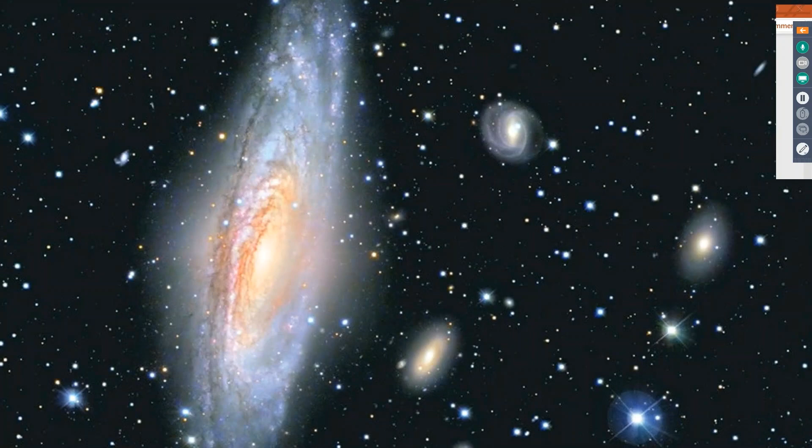I know these are very tedious terms to understand, so let's understand them in the terms that we do. Let's observe the photos they have captured with their camera. Yes, that's what I'm talking about.

The Canada-France Hawaii Telescope, as a leader, understands that they have to stay ahead of the competition. That's why they decided to replace their existing structure with a new one, the Mauna Kea Spectroscopic Explorer. This is where SolidWorks 2019 comes into play. SolidWorks 2019 has many more features that help them design their spectroscopic explorer.

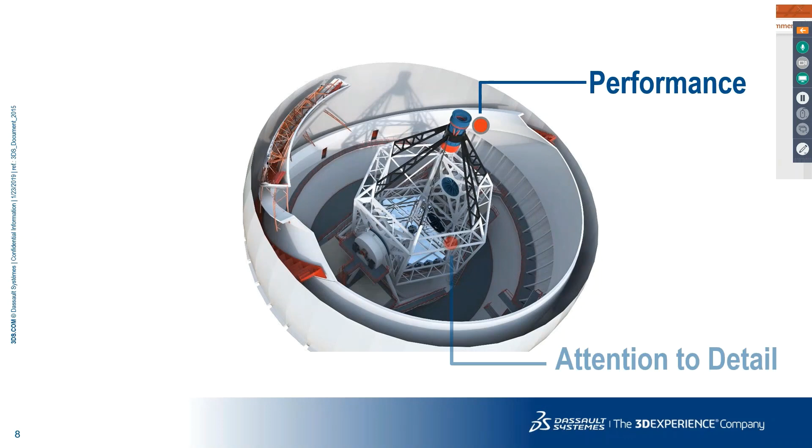So today we are going to see these things in 4 sections. First, we will see how the performance has been improved. Then we'll pay attention to some details. Then we'll see some enhancements from the design ecosystem, and finally, what new and exciting innovations SolidWorks has this year. I hope you are all excited.

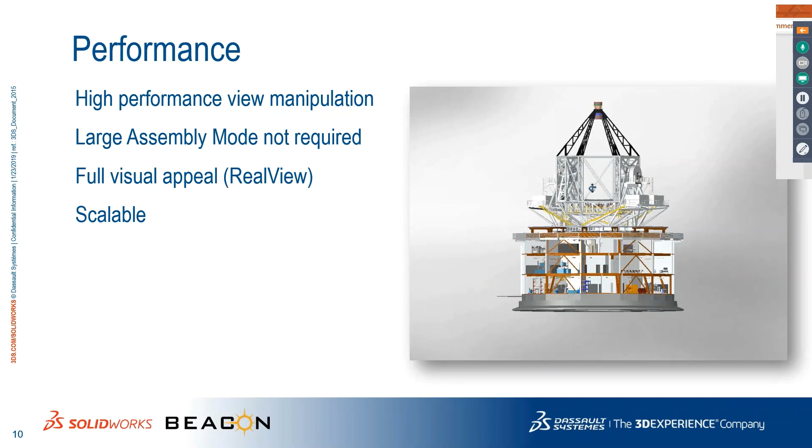Let me start with the first section, performance. The very first enhancement we're going to see is the performance enhancement, in which we'll see how a large assembly can be opened easily while performance is still maintained in SolidWorks 2019.

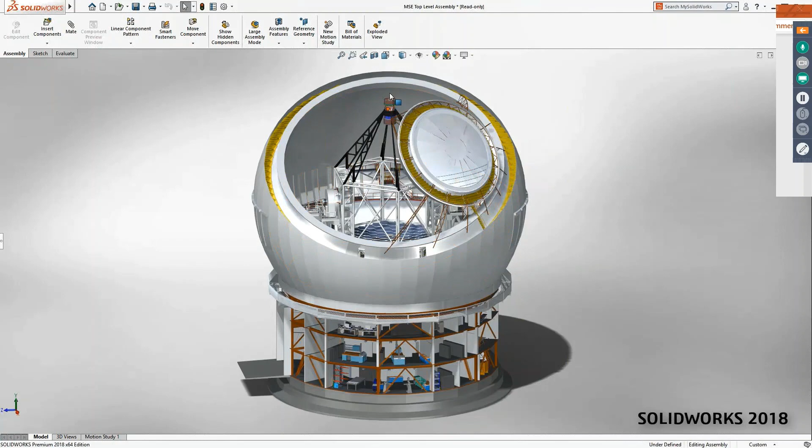Let me jump to SolidWorks. In SolidWorks 2018, as you can see on the screen, if we have to open such a large assembly, we have to activate large assembly mode, and we have to sacrifice details of the components, edges, shadows, real view, etc. If I turn off large assembly mode, these things can still be seen, but my graphic performance is sacrificed, as you can clearly observe the choppiness in the model.

Of course, SolidWorks 2019 changes the game. We can still turn off large assembly mode, and I can still improve my graphic performance. In the side-by-side comparison, you can clearly see how the graphic performance has increased.

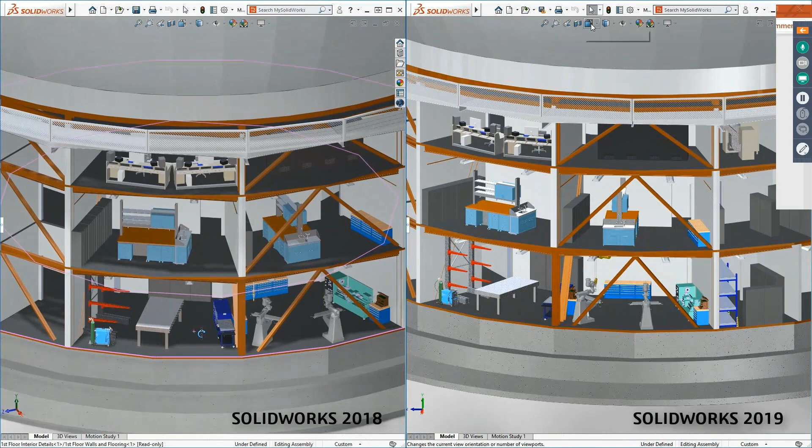Basically, it utilizes more of your graphic card and gives you the real experience of working with large assemblies. Operations like zooming, panning, and rotating will be done very easily in SolidWorks 2019, and it will definitely help improve your perspective when viewing large assemblies.

Definitely. So in SolidWorks 2019, it is now a smoother, more responsive, and real-time dynamic model display that I bring to the table using SolidWorks 2019.

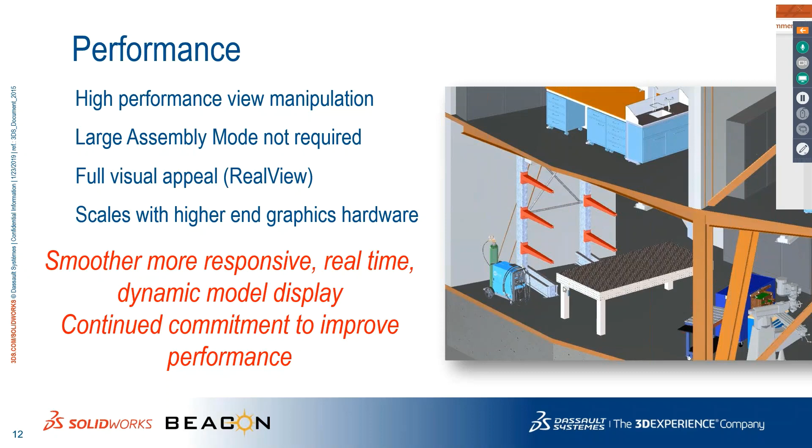Okay, the next enhancement is in large design review mode, and as you can see, we can open assemblies in seconds. Conventionally, we use large design review mode for opening and viewing assemblies. But in 2019, large design review mode has been enhanced, and it's not only capable of viewing, but we also have the capability to add new workflows to it. Let's dive into SolidWorks and see what it has.

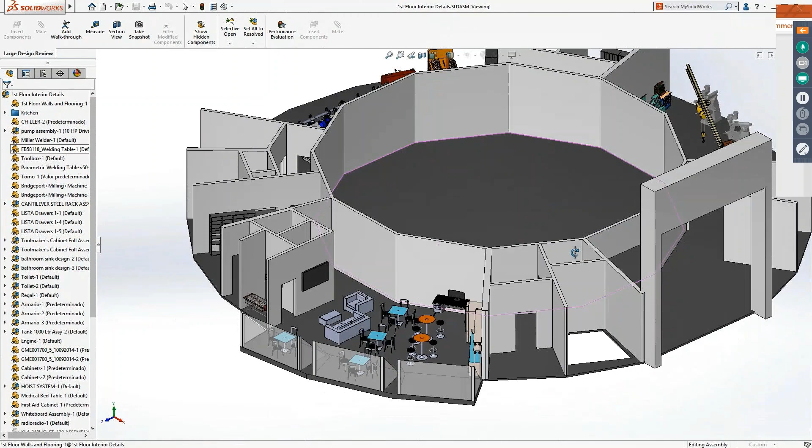When I go to SolidWorks, you can clearly see that when I open this assembly in large design review mode, the assembly opens in seconds, and we have different abilities here. We can select parts, zoom, pan, rotate, and do similar operations. If you want to measure distances between two places or planes, it's possible in large design review. Taking section views is also possible.

Once again, if we hide any components, that is also possible in large design review mode. In SolidWorks 2019, we have a new option of editing the assembly in large design review mode, where we can have the reference plane information displayed along with the mating information as well.

Let me turn on the layout of this pump, and we are going to insert new components here. Now we can insert new components into large design review. If you want to delete any components, that is also possible.

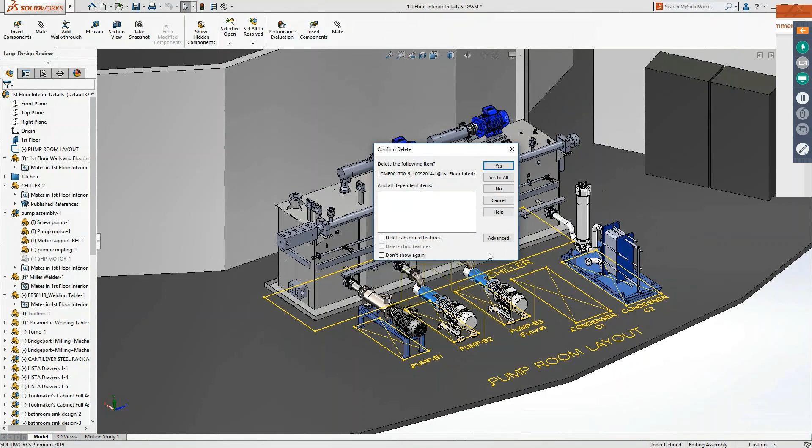Let me go ahead and insert a new component of this pump assembly. We can directly drag and drop these things into the assembly, and next we want to mate this. We can do smart mates like we do with regular assemblies.

The mate displays can also be there, and if you want to add any magnetic mate components to quickly position our assemblies, that is also possible with this new enhancement in SolidWorks 2019.

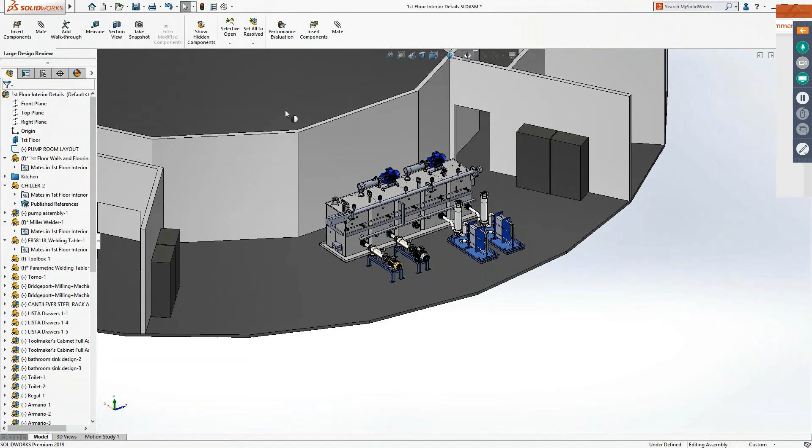If you want to change the configuration of the existing parts, changing the configuration is very easy in large design review mode. And finally, if the components are hidden along the way, we can easily bring back those components like these ones.

Finally, we can save this into a new assembly, and whenever we open this in resolved mode, these components will still be in their places, so we can position the component quickly using this large design review mode itself.

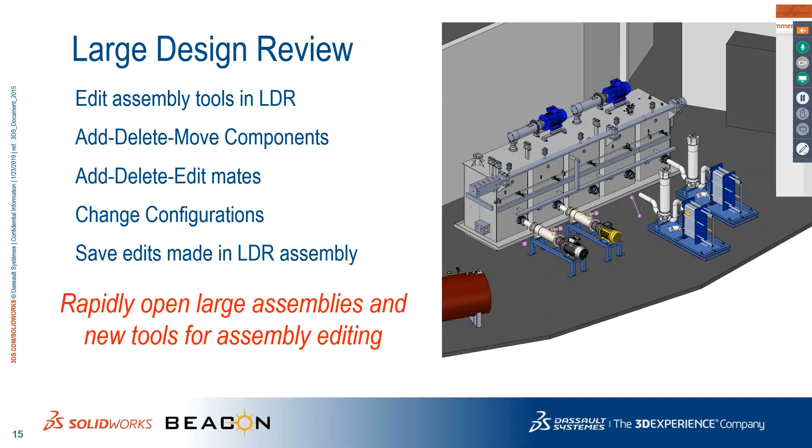So in a nutshell, we can rapidly open our large assemblies, and it is a new tool for assembly editing, the large design review itself. With this, let me move on to the next set of announcements that SolidWorks brings to the table.

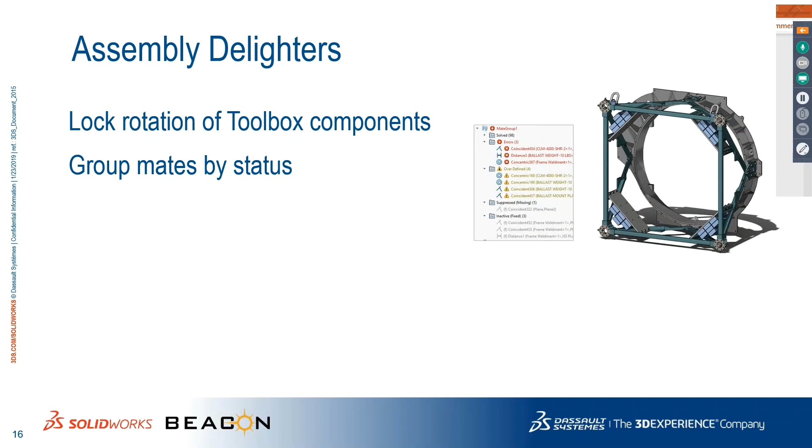This announcement is in Assembly Delighters, and it helps you manage your assembly mates information. Let me jump to SolidWorks and showcase it to you.

When I go to this assembly, as you can see, we are dealing with lots of mates. Now in 2019 we have an option to group these mates by status or by separate fastener. Let me go ahead and group this by status.

As I click, you can see folders have been created where solved and unsolved mates are defined. If you want to edit any mates, we can directly go specify the missing references here, and when I click OK, it will ask me to replace all the missing references at once.

Yes, that is possible. Now if you want to delete or suppress any mates, they will be categorized into their separate folder like these ones. And if at any point you want to delete these things, we can go ahead and delete those too. Finally, inactive mates are separated into their own folder, and with this we can definitely improve performance when dealing with mates in the assembly.

Most companies want their toolbox components to be at a fixed position that does not move. We can just right click over the folder and lock all concentric rotation at once.

In SolidWorks 2019, we have an option of locking these toolbox components directly from the options toolbar. We can hover over the Hole Wizard toolbox, and lock the concentric rotation at once. This will save us time and give us the edge of dealing with mates very quickly and easily.

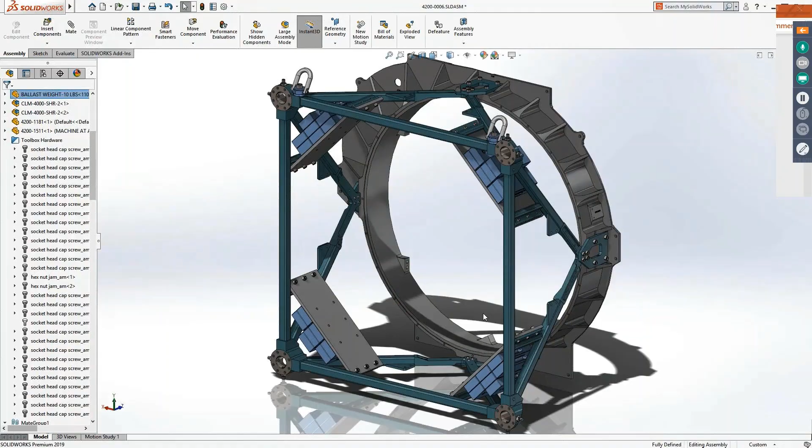So in Assembly Delighters, we have productivity tools for robust assembly interaction, and we can have high quality deliverables done in less time. With this, I'm concluding Assembly Delighters and moving on to the next enhancement, called Silhouette Defeature.

In Silhouette Defeature, we have a very exciting enhancement that will protect our intellectual property. It can create a simplified, visually similar assembly from the original assembly, and of course it will be linked with the original assembly.

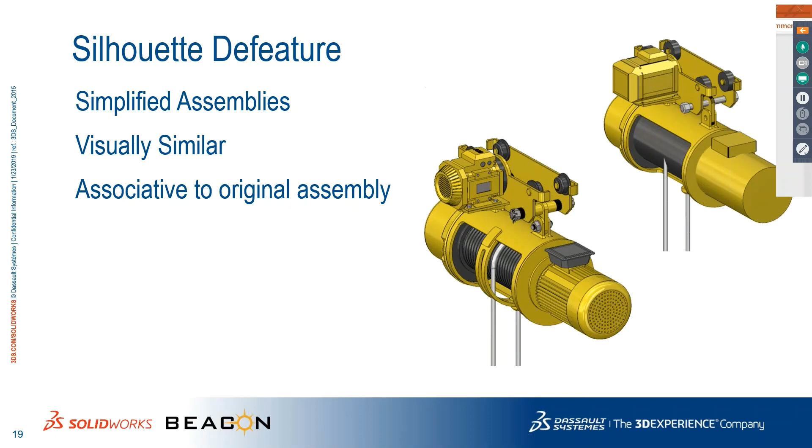Let me jump to SolidWorks and showcase it to you. So assemblies such as these ones are part of a very large assembly of this Spectroscopic Explorer. When I open this into its own window, we now have a new command called Defeature, into which we have an option.

When I click on this command, we have an option called Silhouette Defeature, which can simplify based on the outline of the components. Let me quickly select these components that I want to simplify.

Once it is selected, we can assign the simplification method. For this, I am assigning the copy geometry simplification method. When I add this to the group, as you can see on the right hand side, the preview has been generated, completely in sync with the original assembly.

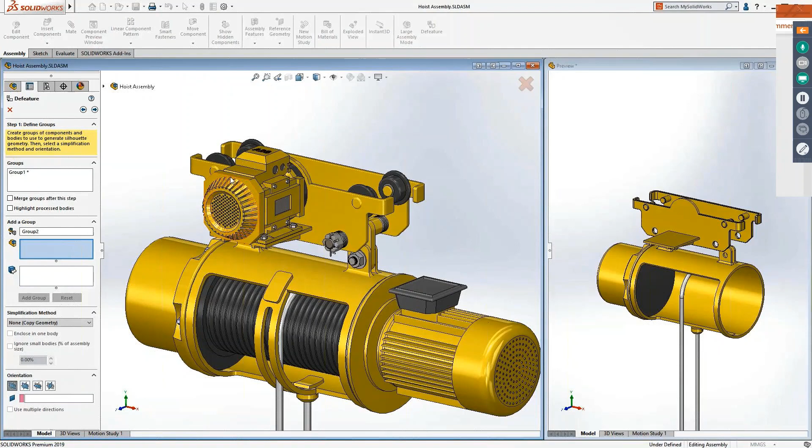Yes, we can, with the new option of selecting identical components. We can select the identical components such as the studs, this cable drive, end plates, and finally the motor, which is the body, and assign them the cylindrical method of simplification.

When you add this to the group, the simplified model is present on the right hand side. We can grab all the hex nuts, the split cable drive, and assign them the polygon outline method of simplification, then add it to the group.

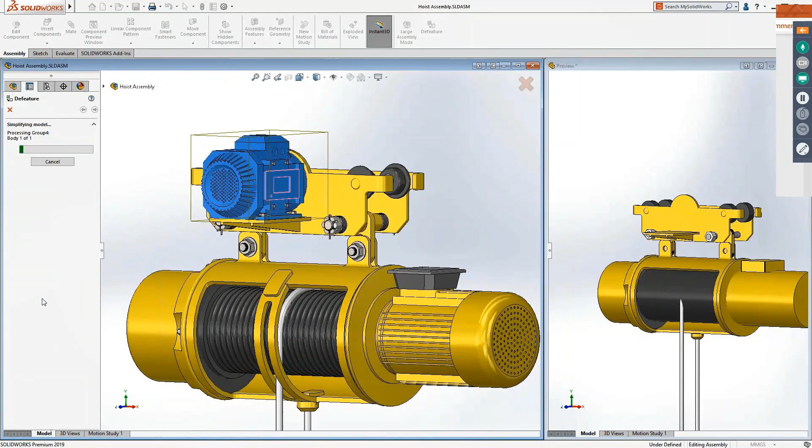Finally, the motor is assigned the tight fit outline method of simplification, and we can have multiple orientations like these ones. We just select the face and the model will be simplified with respect to that. Once everything is done, we can move on to the next.

We can save this as a new document linked to the original, or we can publish this onto 3D Content Central, where others can take access to our designs.

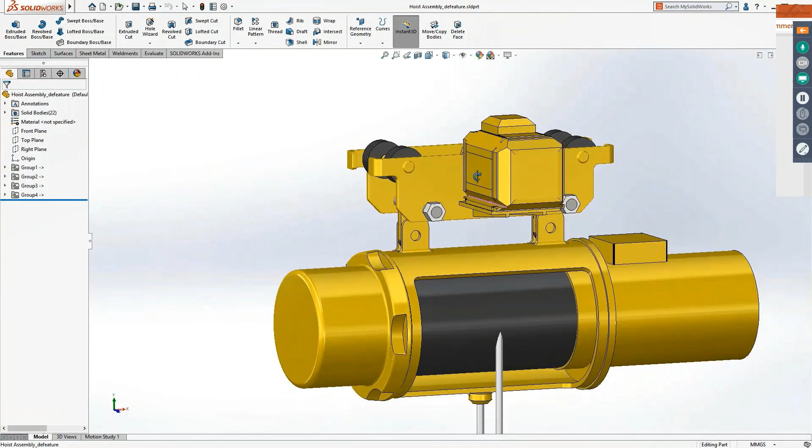But note, we are not sharing our intellectual property. You can see here, no information has been passed, just the defeatured commands here. So with our Silhouette Defeature, we can simplify our assemblies and protect our intellectual property very easily. This is basically helpful for using these assemblies in top level assemblies.

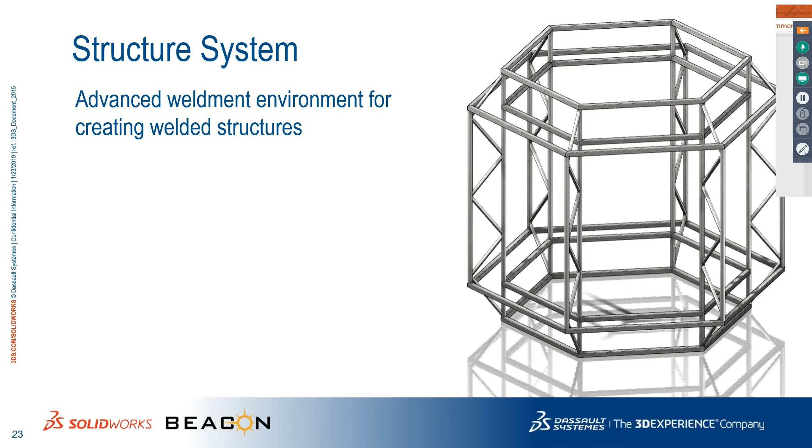Basically, it is an advanced weldment environment for creating welded structures. Conventionally, we used to rely on the weldment and structural member tab. In SolidWorks 2019, there's been improvement, so let's see what that is.

So when I have this Spectroscopic Explorer, there are lots of structure members involved, such as these ones. When I open these into its own window, I want to develop these from the sketches. But in 2019, I can leverage not only sketches, but surfaces and reference planes as well. With these, I can just hide the sketch, and with the brand new structure system command, I can directly add structural members into it.

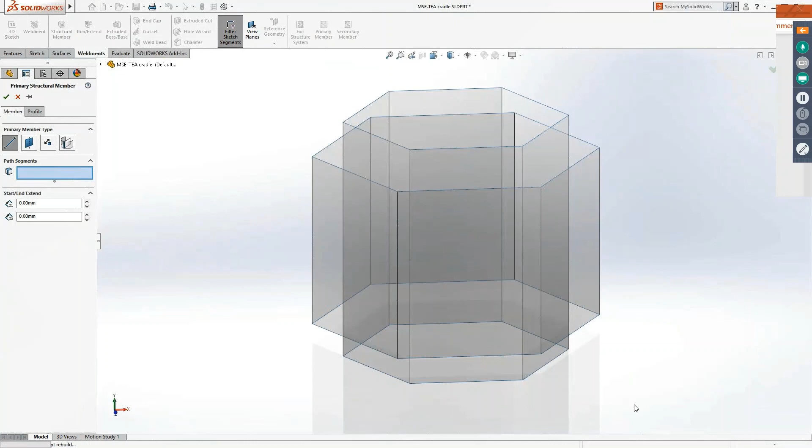For which I am going for the primary members first. When I click on it, I can select these things with just a box selection. As you can see on the left hand side, I have added 36 members all at once. Now I can take control over the profile type and size of this profile, and when I click OK, these members will be added.

If you want to change the members, let's say these members, I can directly select those things and assign a different type of profile to it. So when I click OK, these members will be changed now.

If you want to select the other primary members, such as these sketch ones, the sketch entities can also be selected and assigned different profiles.

With this, we can go now for the secondary members, which run through the primary member, for which I am selecting the support planes here. When I select the support planes, I'm linking this member with the primary members. So when I click the primary members, such as these ones, it will automatically let us specify the profile types. When I click OK, my structure is ready.

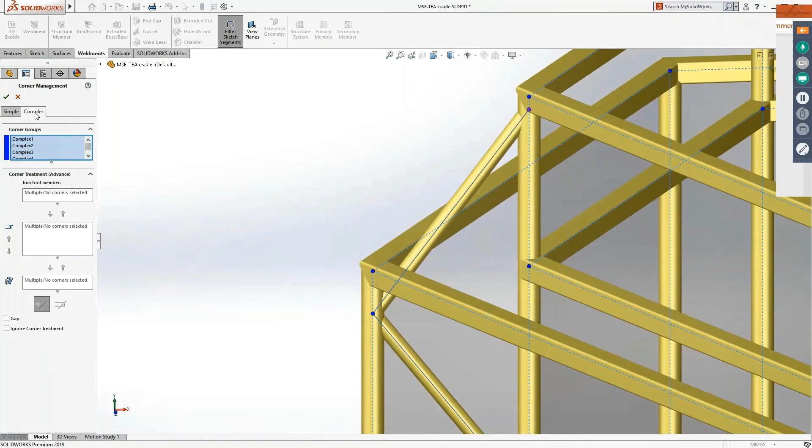Now let me focus our attention toward corner management. As soon as we exit from the structure system command, we have the corner management option where we can manage simple or complex corners. For the complex corner, we just select the corner we want to manage, and we can take control over its trim order, like these ones. When we control this trim order, you can see the dynamic graphic display on the right hand side. The corner management option is very helpful in this case.

So likewise, we can go on and manage other corners too.

So let's say I'm managing this complex corner here where the trim orders need to be managed. I can move these members to the lower box, and once everything is set, I click OK and the corners will be managed.

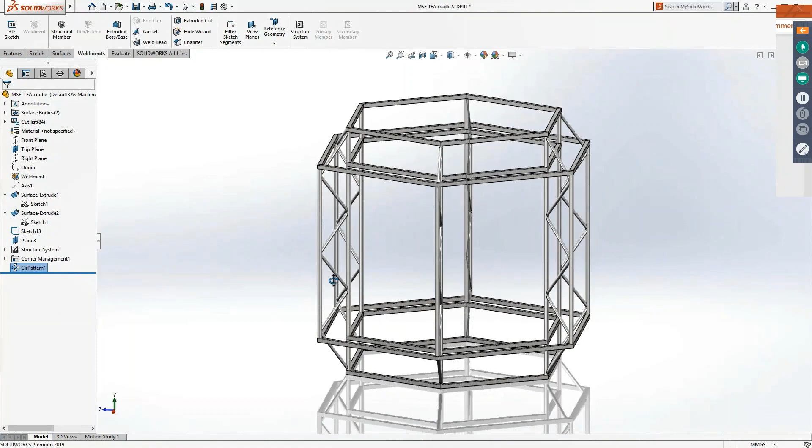With this, I'm selecting the axis for which I'm selecting a circular pattern, and the bodies that I want to pattern. Just like that, I have added 84 members within just a second. That's the benefit you get when you deal with the SolidWorks 2019 structure system - it gives you a new workflow for creating complex welded structures very easily.

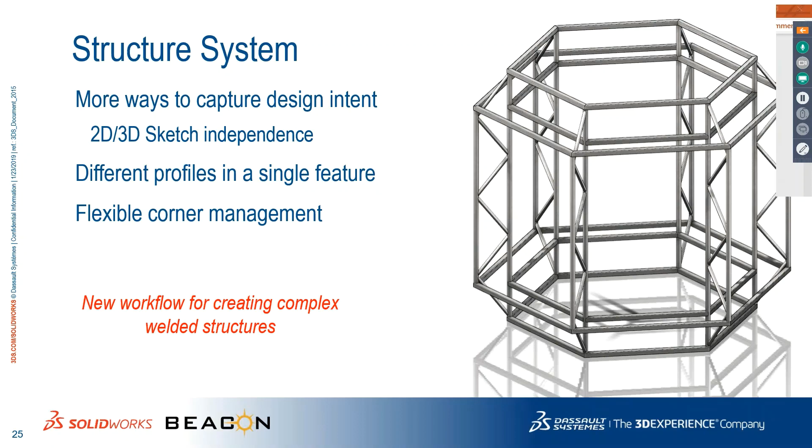So with this, let me move on to the next announcement, which is a long-awaited enhancement, and every user needs to have this enhancement. Of course, I was also willing to have this enhancement very early.

In SolidWorks 2019, we have the new enhancement of multi-body interference detection. We can do the interference detection in the part environment itself. Basically, for multi-body parts, which usually are weldments, we can now detect the interference in it.

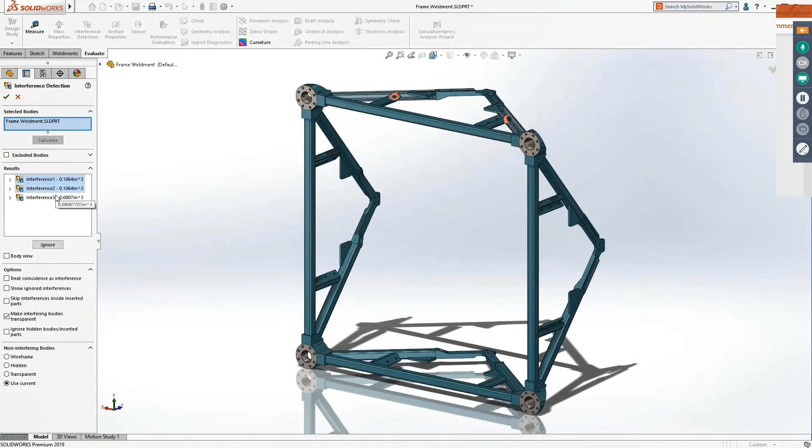So when I visit SolidWorks, as you can see the weldment environment is there, and when I go to this Evaluate tab, I now have the option to determine the interferences here. When I calculate the interferences, you can see there are 3 interferences present. Now back in the Weldments tab, I can go and manage the trim and extend of these components very quickly.

So with the help of the multi-body interference detection, we can now save time for complex multi-body parts.

The next announcement is Tab and Slot. Tab and Slot are basically used for self-fixturing purposes, mainly in the sheet metal industry, and not only that, we can use this for weldments as well.

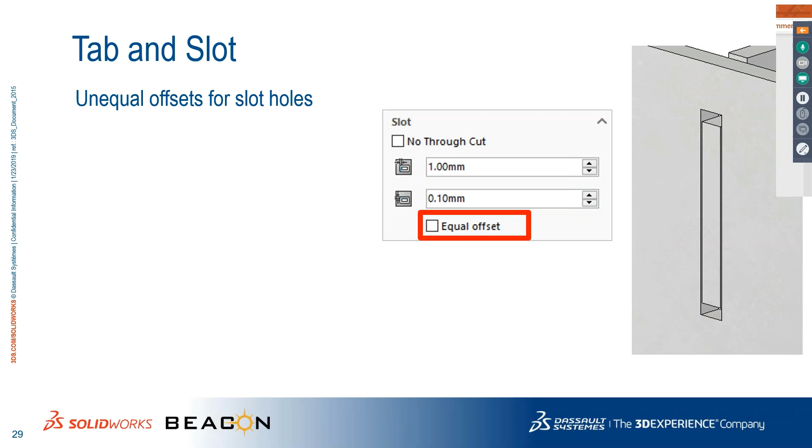In 2019, Tab and Slot has been modified, and we now have the option of unequal offset for the slot holes. In 2018, we only had the option for sharp corners, but in 2019 we have different options for corner types as well, such as fillet corners, chamfer corners, and circular corners, so we can control these corners very easily.

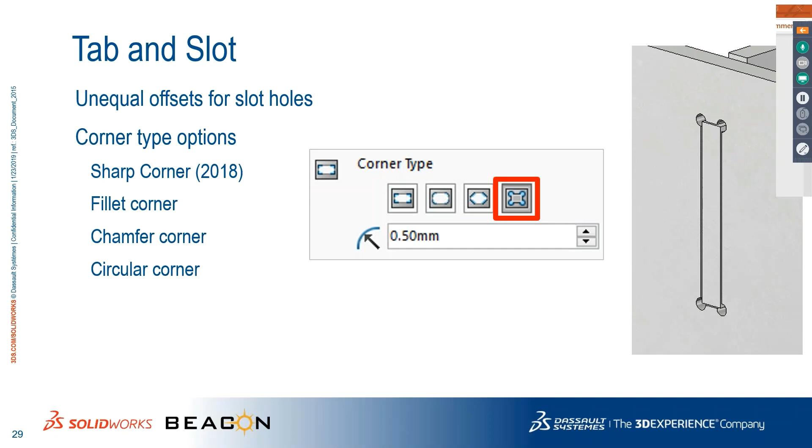Not only that, we have the option for creating the slots either blind or through wall. We can take control over the depth as well.

With the new option of linking the group together, we save time instead of using multiple tab and slot commands, clicking again and again. We can group those together and link this within a single tab and slot command, saving us time.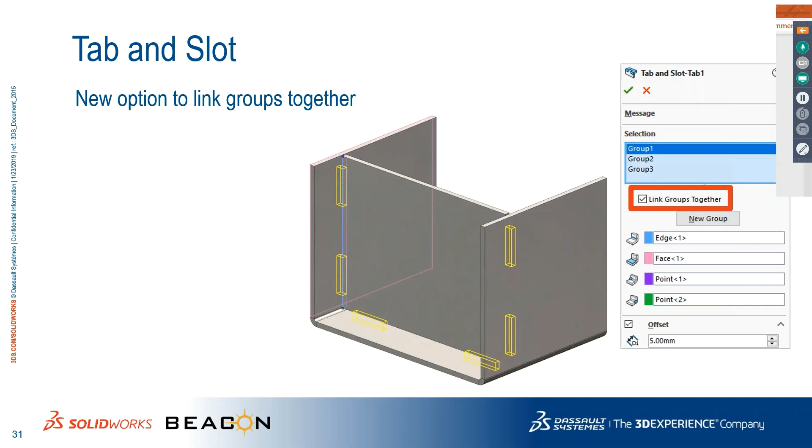So with these Tab and Slot enhancements, it is now very easy to work with tab and slot and do self-fixturing of parts.

And with this, I am moving on to the next announcement, which is one of my favorite announcements - that is called the Part Delighters.

It has the ability to work with mesh geometries, and it can transform image appearances into geometry. With the help of these Part Delighters, we can do these things very easily. So let me jump into SolidWorks and showcase it to you.

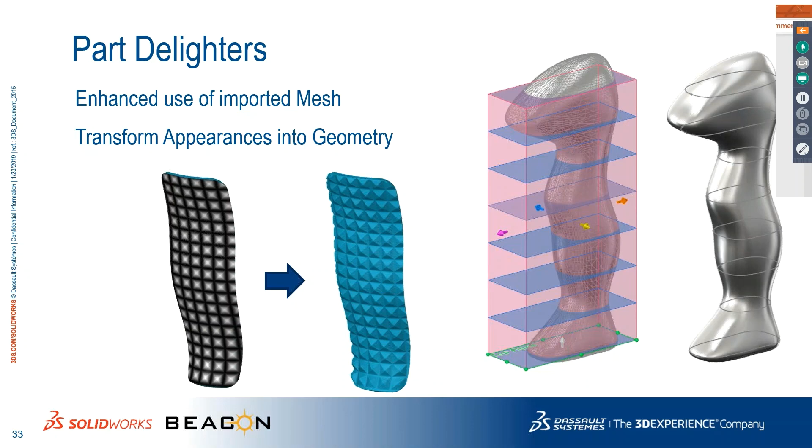For complex shapes such as this handle assembly, we usually manage these things by scanning them and making a surface out of it afterwards, then going for the solid and designing this part. With these things, I already have a lot of surface bodies involved here. We'll see the way.

For that, we'll just import the mesh bodies here, such as this 3MF file. When I open this 3MF file, you can see the geometry is obviously in mesh form.

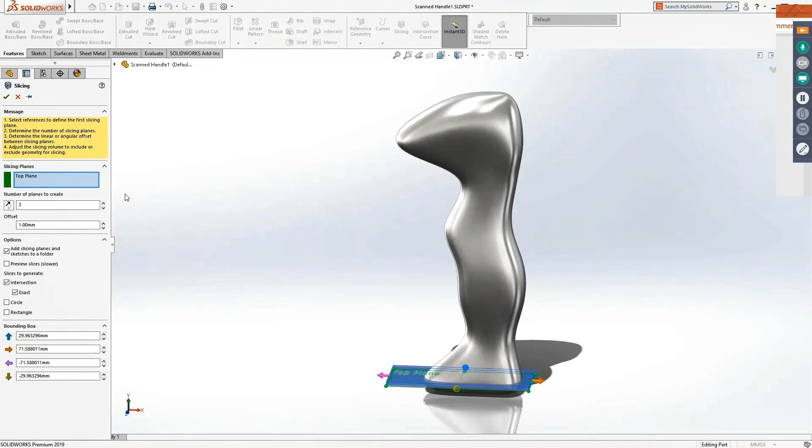With the new command we have in SolidWorks 2019, we can use the slicing command here, and we can create the number of planes that we want with the offset. When I click OK, the sketches and the outlines of these can be created and organized into separate folders. We can obviously manage these things according to our preferences.

Once that's done, we can hide the mesh bodies, and with this I can go to the Surface tab and create the loft surface here. Just a few clicks and you can see my body taking its shape, and when I click OK, it is generated just like that.

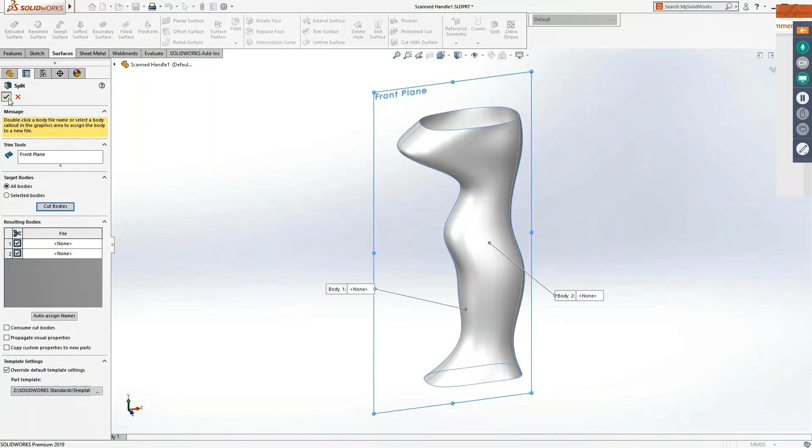This is a symmetric body. We can split this into the two bodies with the split command, and you can see there are two split bodies that are connected. In order to add a logo, I can go to my design library and add the logo in here. Just pick and place this, and I'm ready to project this onto either side of the surface body.

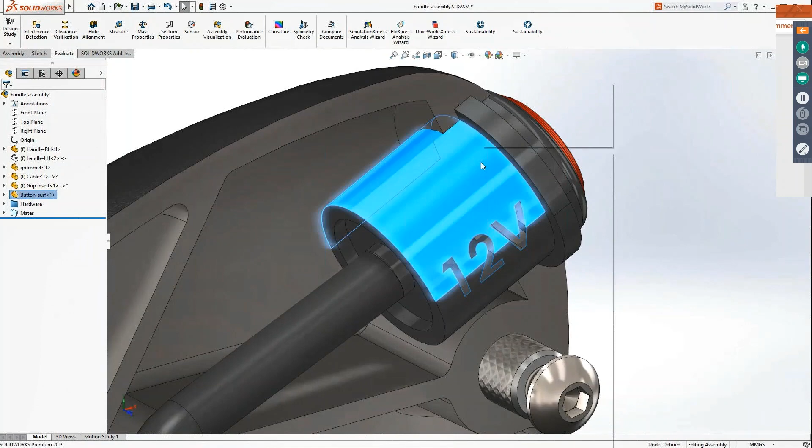With the help of the new project curve and bidirectional option, I can now project this into both directions, like these ones. So let me move on to the main handle assembly. When I hide this component, you can see this button part is a surface body. Let me isolate it, and this needs to be a watertight body now. With the new delete holes option, I can select these holes, like these ones. Once selected, when I click OK, it will be patched accordingly, and a watertight body can be created.

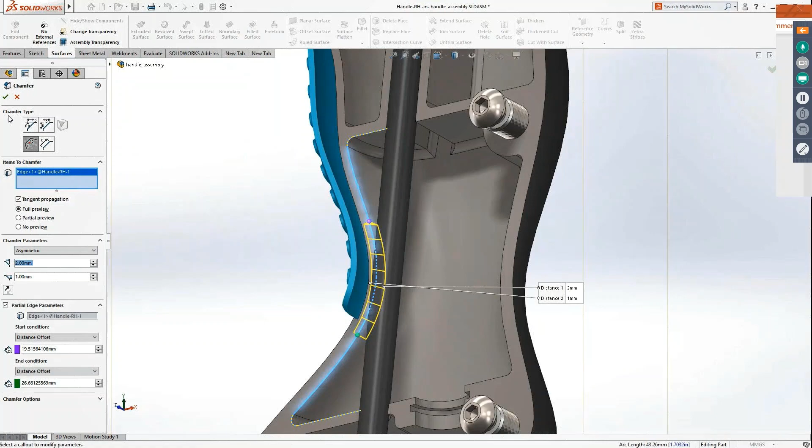The interference has been suspected between these two parts of the handle and the cable. Quick interference detection can confirm our suspicion that there is indeed an interference. When I edit this part with respect to the assembly, with the help of the new chamfer option of the partial chamfer edge parameter, I can now take control over the chamfer, just like this. Cool, isn't it? I can have symmetric as well as asymmetric parameters of the chamfer controlled in here, and when I click OK, the chamfers will be there with the controlled environment.

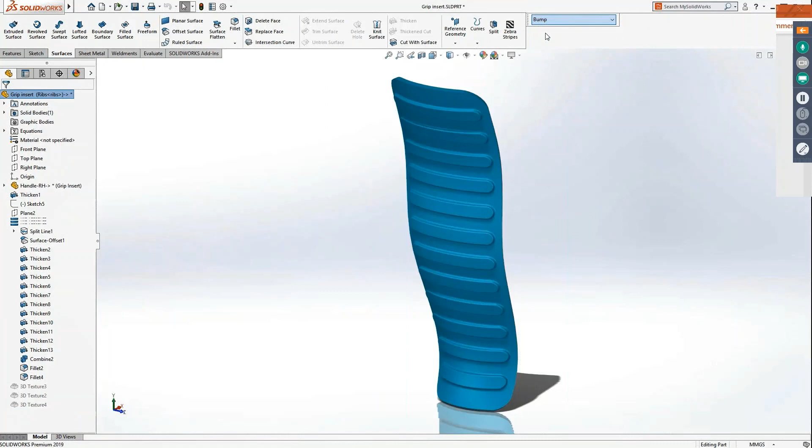Okay, with this I'm moving on to the grip that is shown here. Patterns such as these are created with different features applied in here. But not only that, we need different variations such as these bumps, dimples, and the logo, just to give an option. Creating these things is now very easy in SolidWorks 2019. So let's go ahead and create these things using just an image.

When I project this image onto the surface and map this accordingly, I specify the sizes like these ones. Now when I click OK, into the solid body folder, I can go and apply the 3D textures to it. Yes, just from an image. We can define a maximum element size for the textures, and just like that, my textures will be ready. Cool, isn't it?

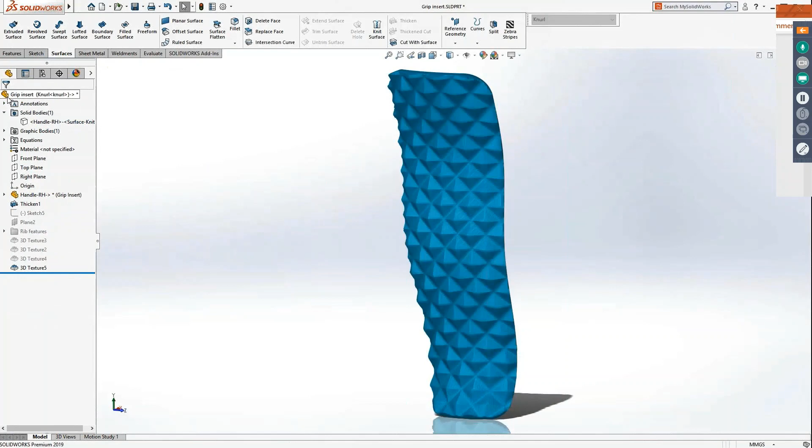So when I go back to the main assembly, what I can have is the configuration which I can change just by clicking OK in here.

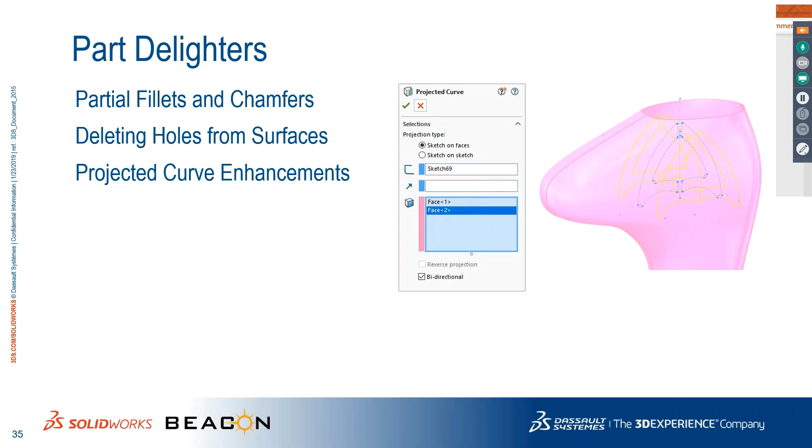So, in a nutshell, we have the new option of partial fillets and chamfers. We can control the chamfer length with these things. The delete hole from surface gives us the advantage of patching the hole very quickly for surface bodies. The projected curve enhancement with the bidirectional option can save us time, avoiding the use of multiple project curve commands all at once. And not only that, we can convert image appearances to 3D textures. So with all these, mesh to manufacture is simplified with a deeper depth of functionalities.

We can do this easily in SolidWorks 2019. Okay, with this I'm moving on to the next set of announcements, which is in user experience.

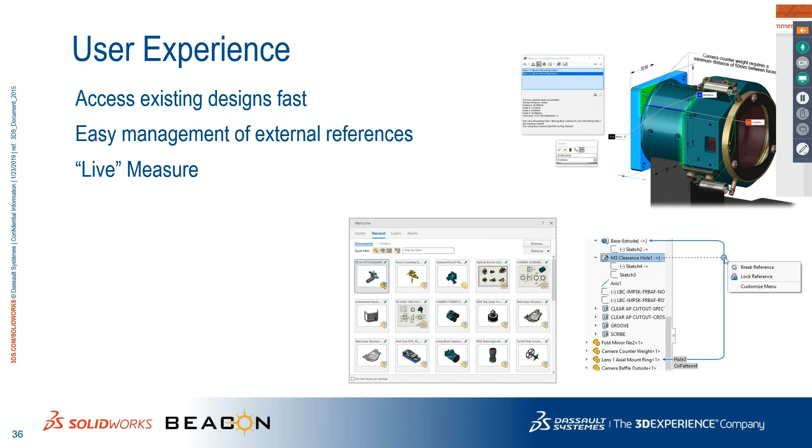In user experience, we have options to easily manage external references. We can now open the 100 recent documents all at once. We can quickly filter it according to part, assembly, or drawings, or even by name. We can specify the filter types in here. Not only that, external references can be managed very easily just by these dynamically referenced views, and we can easily break or lock the references that we like in here.

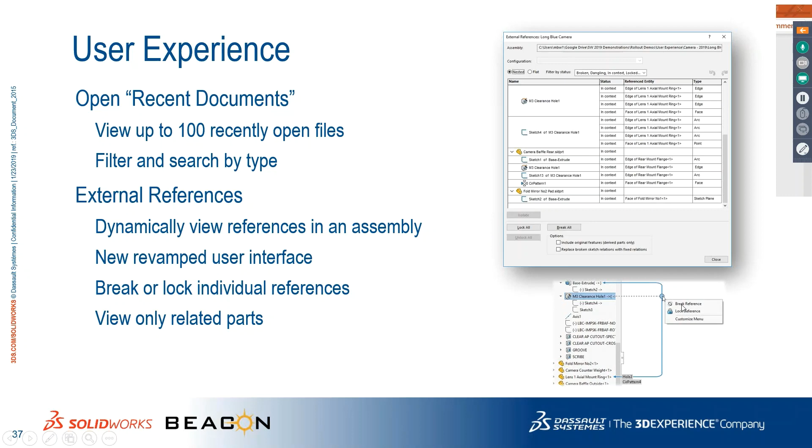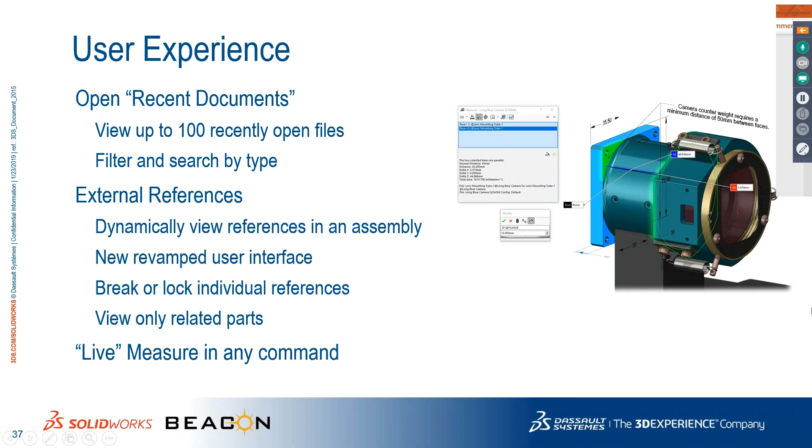Not only that, we have the option of the live measure command in here. With this, if we just turn on the mass property, let's say of this flange showcased here, if I modify any dimensions of it, the mass property will simultaneously get updated, giving us live feedback using this live measurement. So with all these enhancements, we now have greater power and ease of use in everyday's workflow.

Another set of enhancements that SolidWorks brings to the table this year is in the drawings. Let me jump to SolidWorks and explain these to you.

Creating complex section views is a very easy task now. With the help of this removed section, we can select these edges, and once the opposite edge has been selected, the section view will be generated alongside these.

If we want to focus our attention on the upper view and specify tolerance information, with the help of this new tolerance modifier, I can specify more tolerancing information and symbols here. If you want to specify the symbols, I can go on and specify symbols such as these. Once it's done, let's move on to the next announcement, which is the hole table.

We can easily generate a hole table using SolidWorks 2019. We select the hole table, the references here, and once it's done, the hole table will be created like this.

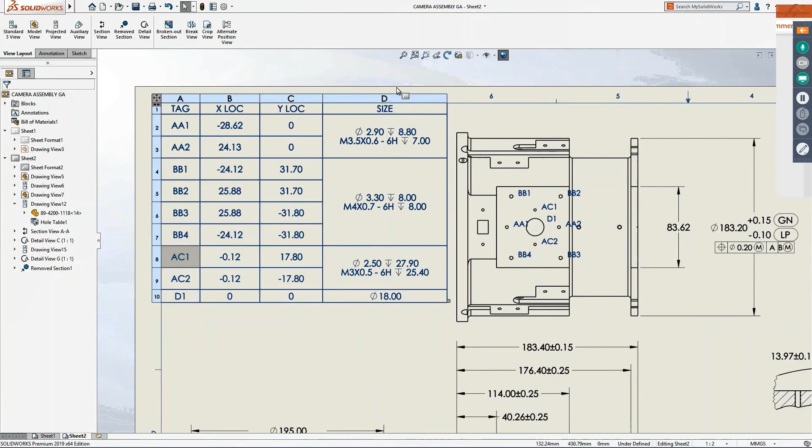We can combine the same sizes, and if you want to change a specific tag, we can specify the prefix to it, like this, so I can clearly take advantage of the hole table information.

We also get a live measurement change using SolidWorks views. Live update can now be excluded for specific views to manage complex drawing views. Let me visit the part here—it's a camera body—and when I modify this flange, let's say from 7 millimeters to 13 millimeters, and click OK, whichever view I excluded from automatic update, we can now update independently. This is really helpful for managing complex drawings in our day-to-day activities.

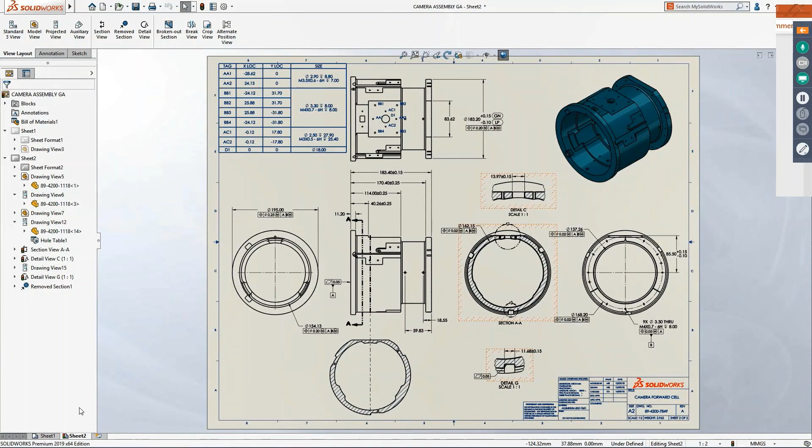Next, the bill of material capabilities have been enhanced. Of course, SolidWorks already has ready-made bill of material capabilities, and now in this 2019 release, the thumbnails in this dynamic display can be saved to Excel. Just right click here and go to Excel.

We can include the image of these thumbnails, and when I save this, you can see we have a very intuitive and interactive bill of material available with us. So with all these enhancements, we've increased the performance and greater flexibility whenever we work with 2D drawings.

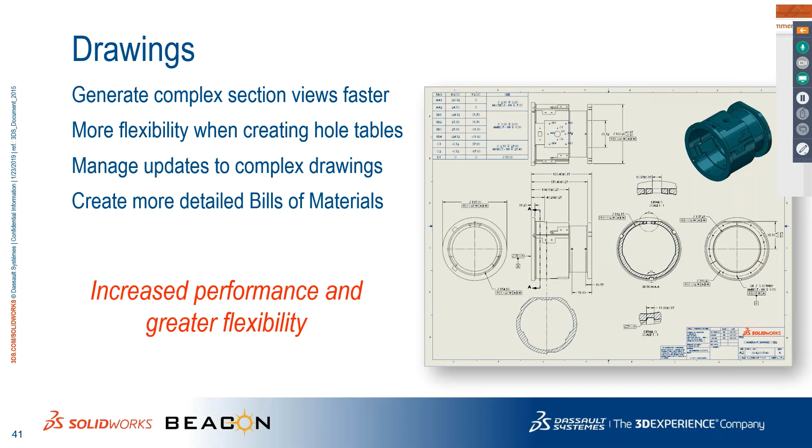With this, I am concluding the second section, attention to details, where we have captured critical design details with ease. Now I am moving on to the third section, design ecosystem. Let me explore the enhancements in this section.

The first set of enhancements are in eDrawings. eDrawings is a great tool for viewing SolidWorks data. We can view 2D as well as 3D without SolidWorks, and in SolidWorks 2019, eDrawings has been modified.

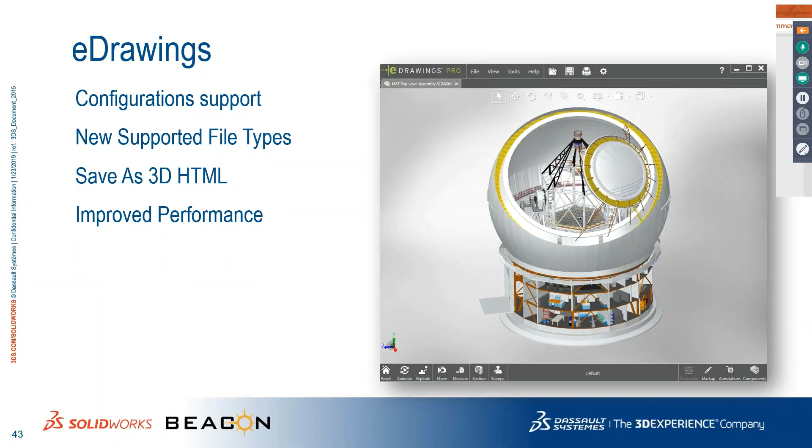Let me jump to eDrawings, and as you can see the user interface, when I go to the File tab to open files, I now have an option to open different file formats: Parasolid, Solid Edge, Pro Engineer, JT, NX. Yes, we can open those files now.

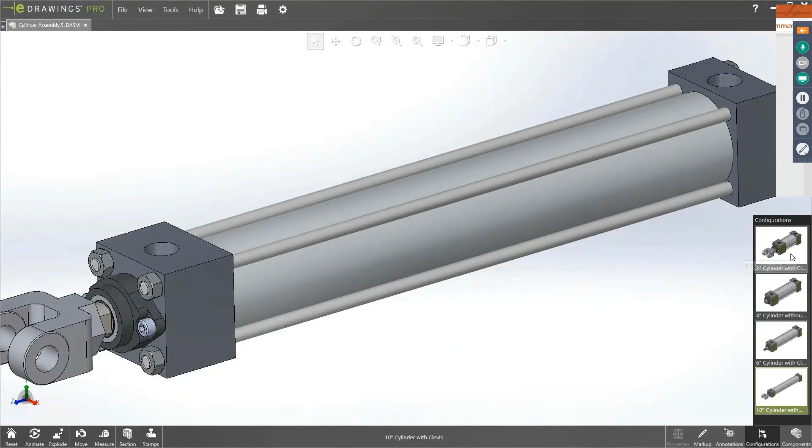Let me open the SolidWorks assembly file. I now have an option to select the configurations—yes, we can browse to different configurations here.

Once it's done, I can save these as an HTML file so I can upload them onto my website. When I open this HTML file, you can see the same eDrawings environment will be there on our HTML file, where we can take control over the components.

We can view the components independently, and view the configurations here as well. If any exploded information is there, we can readily access those exploded views. Not only that, we can have section view capabilities in this HTML environment as well.

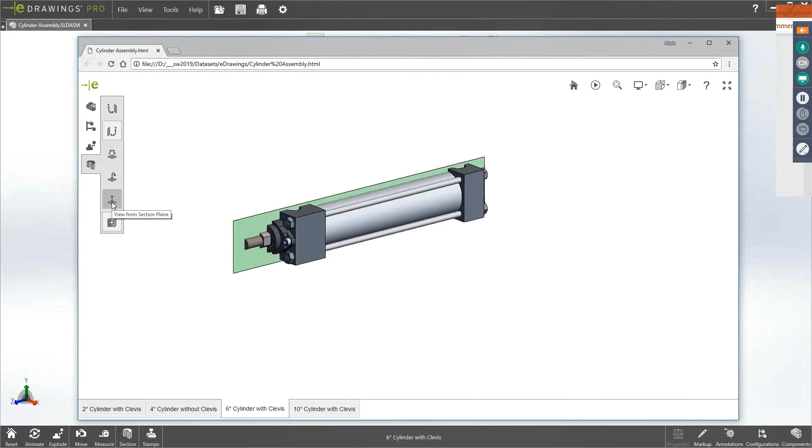Along with this, we can now reset our views or play any standard view animations. Not only that, we can have occlusions and perspective views into this HTML environment as well. For comparison, I have SolidWorks eDrawings 2018 and 2019.

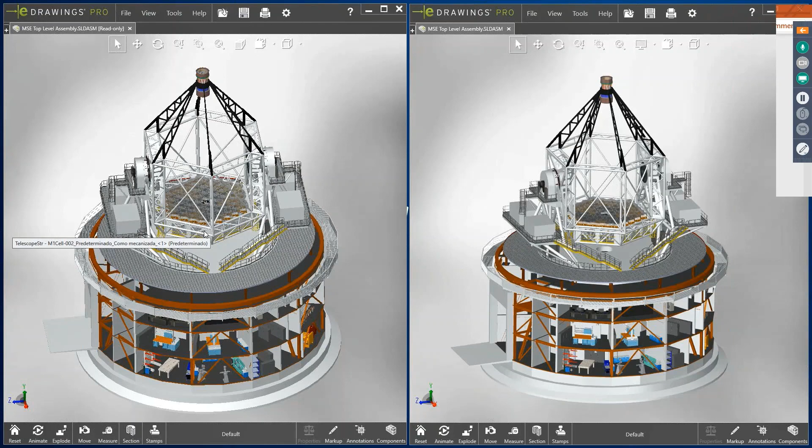In 2018, you can see there's still a lag in the geometry. In 2019, we have a massive boost for graphic performance in eDrawings. As you can clearly see, operations such as zoom, pan, and rotate lag in SolidWorks 2018, but when we move on to SolidWorks 2019, these operations are now much smoother and more responsive.

Now into eDrawings, we have the option of new file type support and configuration support, and we can save this as a 3D HTML with improved graphic performance, which is more reason to make eDrawings your go-to tool for CAD viewing purposes.

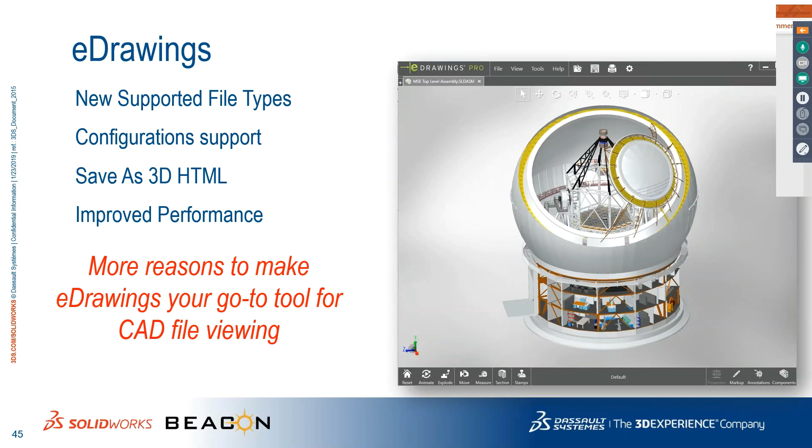The next enhancement is called SolidWorks Treehouse. Treehouse is a very useful way to manage the assembly structure. In 2019, we have options to manage the treehouse very easily. Let me jump to the treehouse and showcase it to you.

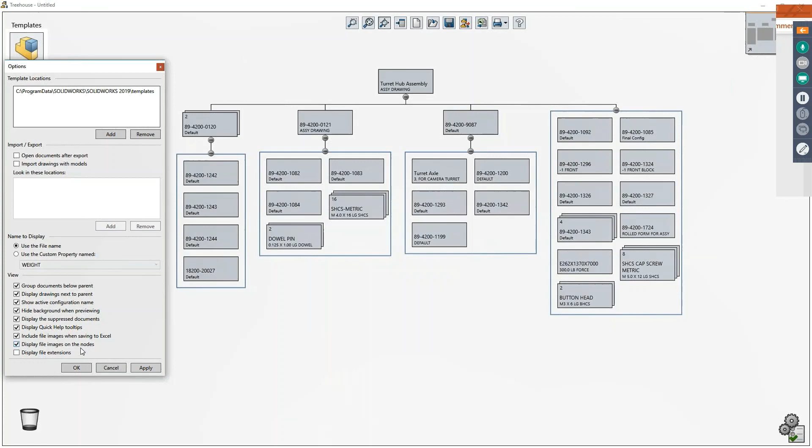Whenever you want to open any assemblies, just drag and drop the tree into the treehouse environment. Once it is there, you can see the assembly tree structure displayed here, and we now have an option to exclude the image of this treehouse structure, giving us more manageable space and allowing us to add more components. If you want to categorize our tree structure based on other custom properties, we can now select those as well.

This information, let's say the description, will be displayed onto this tree diagram itself.

If you want to add other parts, let's say I want to add a part, I can drag and drop the part here onto this subassembly, and now I can specify custom properties directly before creating the parts themselves. So it's a great way to manage the assembly tree structure beforehand, before creating the assembly itself.

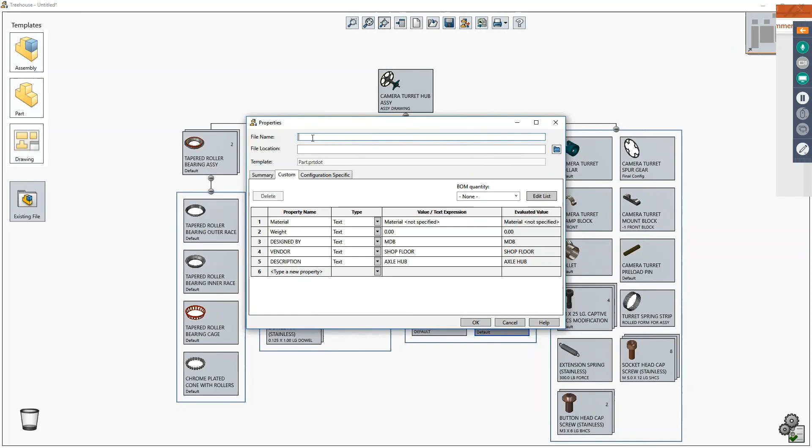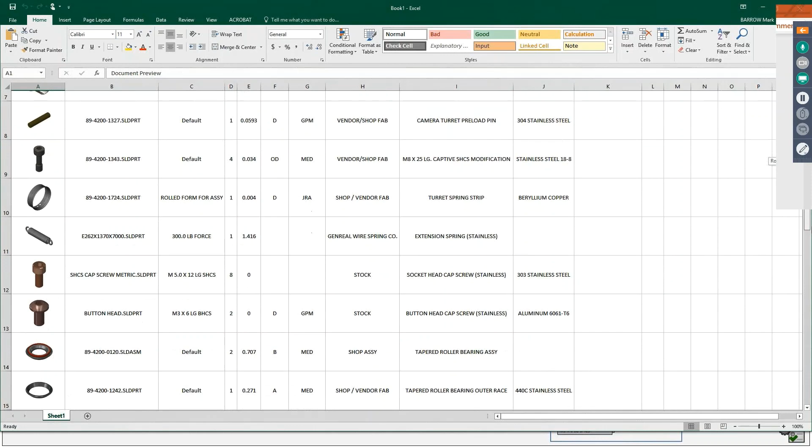So when I click OK, now it's time to export our assembly structure into the bill of material of the assembly. Just like we have in a SolidWorks drawing, the assembly tree structure with thumbnails can now be seen in its own window.

So with the treehouse, we now have greater flexibility in creating, managing, and sharing assembly structures as well.

So with this, I'm concluding the third section of the design ecosystem, which has the complete design-to-manufacturing solutions. And I am starting the very last section of this presentation.

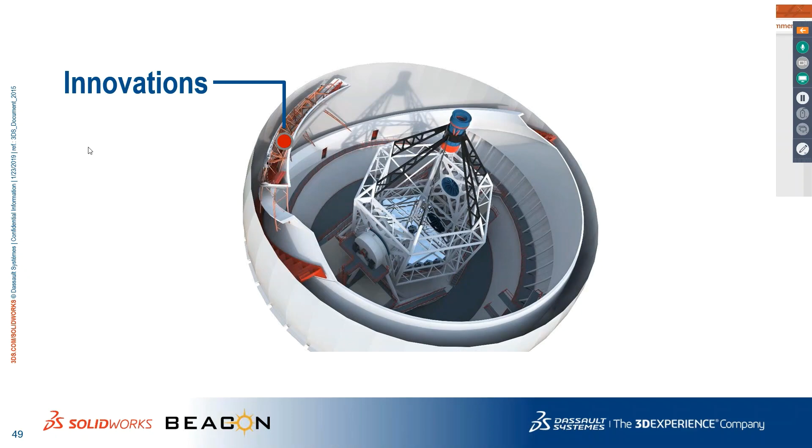With the help of this innovation, what I can do is present the first set of innovation, touch and gesture sketching. In SolidWorks 2019, this environment has been improved, and let me showcase it to you right away.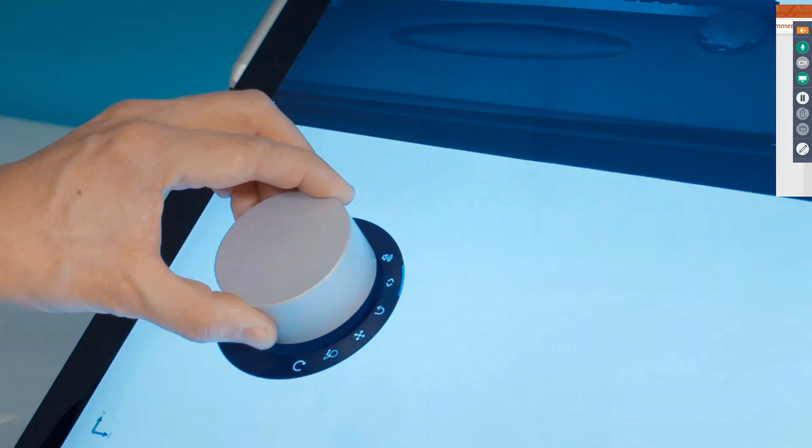If you want to manage any assemblies like these, we can do this with the mouse, of course. Not only that, if you have any touch and gesture devices, such as this Microsoft Surface Dial Pad, I can now take control. I can rotate, zoom, and access my commands at my fingertips, giving me full control over my design.

Not only that, if you have touch devices and a stylus, I can define the stylus size here, and whenever I draw a freehand sketch, it will automatically be recognized as splines. With this, I have the ability to manage complex curves very easily.

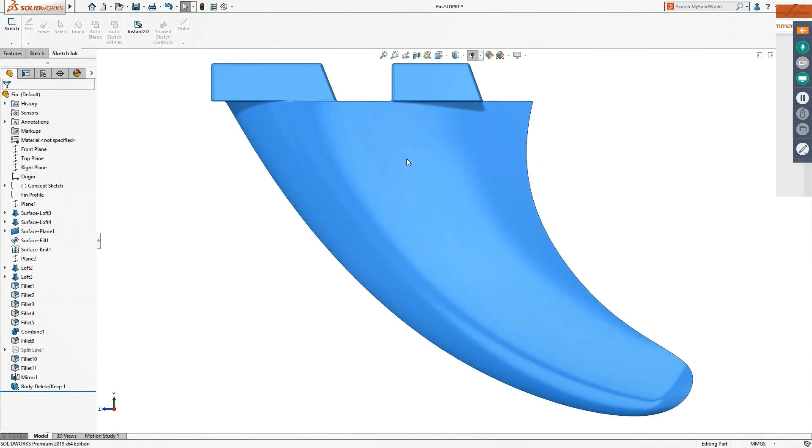Not only this, if I have the requirement of adding other geometry such as a slot, it will automatically be recognized, and if I specify any dimensional information, let's say these measurements, it will automatically be assigned to that particular dimension.

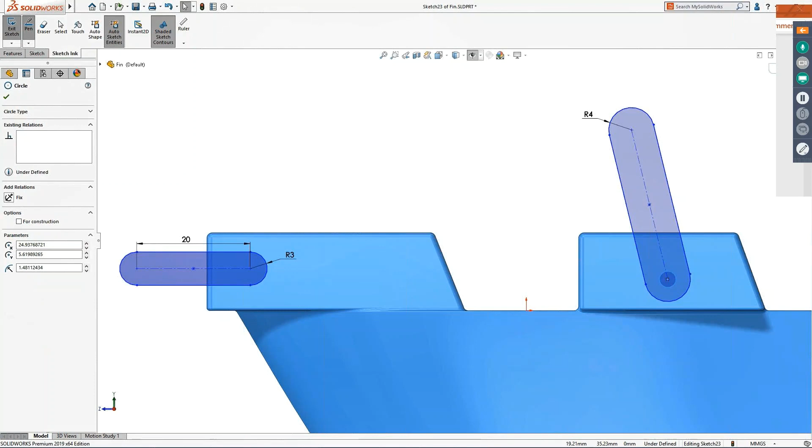Yes, like these ones. If you draw any other entities such as the circle, this geometry thing can be done there as well, and we can further process with the commands of SolidWorks.

Not only this, we have enhancement into the mates as well. With the help of smart mates, let me open this assembly here. When I click on smart mates, I can directly click on the surfaces that I want to mate.

Like these ones. And finally, if you want to play the animation of these things, the animations can be played just by rotating our fingers.

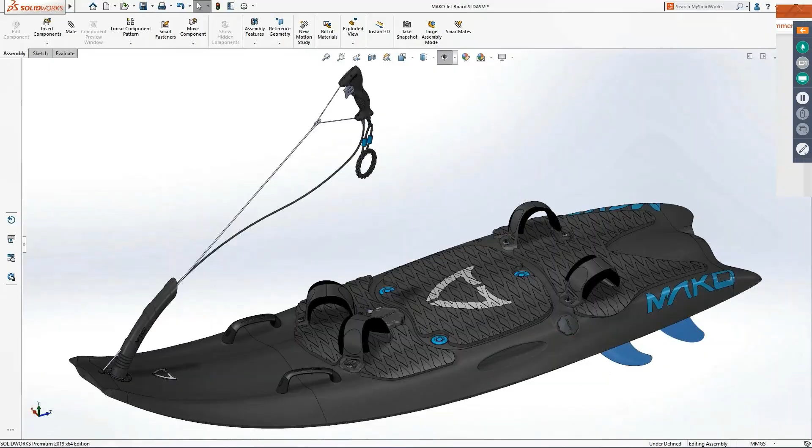So in SolidWorks 2019, we now have option for the enhanced user experience for touch devices, and we can easily edit and navigate designs on the go.

SolidWorks touch and gesture sketching now supports more entity types such as splines, slots, and handwritten dimensions can now be recognized on the screen.

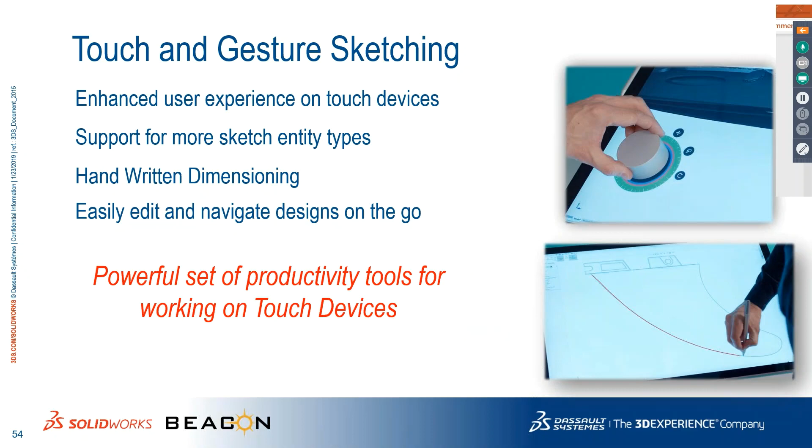And with these set of productivity tools, it is now very intuitive to work with touch devices. So I hope you all like this announcement, right?

In addition to these things, we now have 3D markups here as well, just like we give revision clouds onto our 2D drawings. So we have 3D markups in here.

Let's say I want to change my design some here, or mention any comments in here. I can now directly do this with the help of this 3D markup directly on the screen, like these ones.

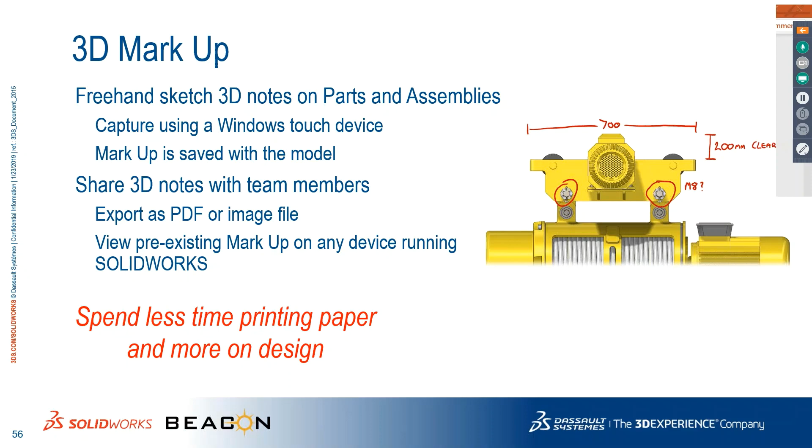The freehand sketches and 3D notes, which are mentioned in the part and assemblies, can now be saved onto my 3D markups, and we can share this with the team members and improve our design communication, which allows us to spend less time on printing paper and more on the design.

The last set of announcements are into SolidWorks extended reality, which is also one of my favorite announcements. You can now do these things into eDrawings Direct VR, and SolidWorks has the extended reality exporter. Let me jump to these two things and show it to you.

So if you want to display the model, such as this spectroscopic explorer, into eDrawings, we now have the option to open this into VR. Just do the scene settings.

When we put on our headset, we now have the option to jump into our design. So when I go, what I can do is I can literally walk, climb the stairs. Yeah, it is complete freedom for us to explore our design.

Not only this, whenever I go, I can climb the stairs. If I want to pick and place any objects, I can just pick the objects. If we leave the object in there, it will automatically sit into its own position.

Along with this, SolidWorks has the extended reality exporter into its save as format, with which we can export this file and do much more with it.

If you want to have the user experience such as these things, yeah, it is now possible with the help of extended reality exporter. So SolidWorks 2019 gives you a definite edge to deal with the next generation design.

So SolidWorks extended reality exporter, it is extended reality solutions. It's made easy for your design process.

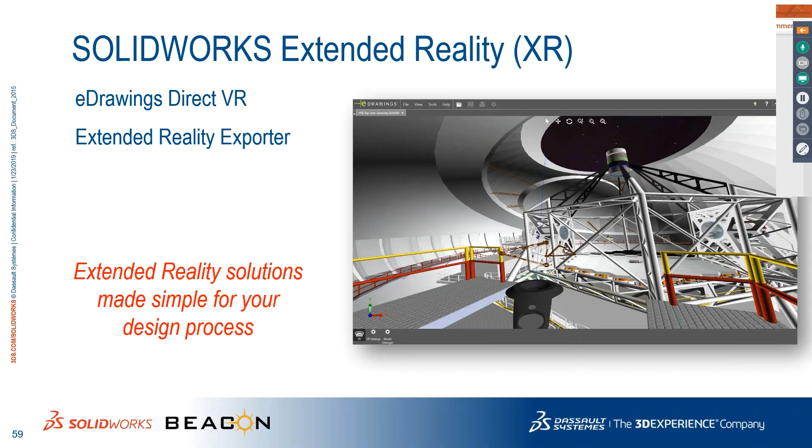Okay, so with this, I'm concluding my last section of innovation. It's exciting new ways to work with SolidWorks. So in a nutshell, let me summarize this webinar into the video. So get ready.

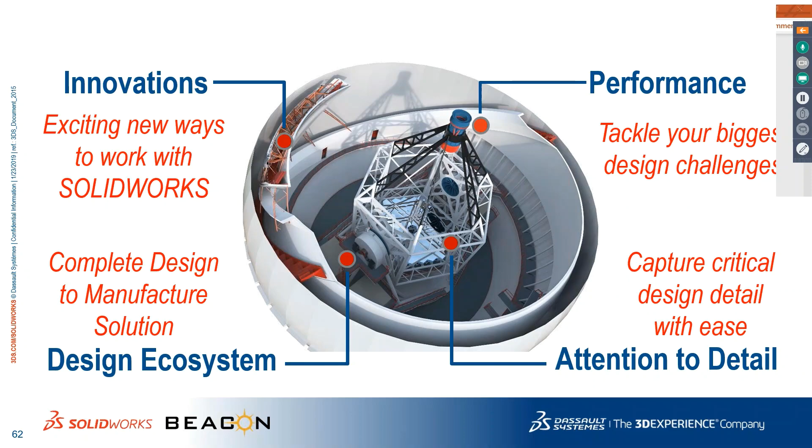So let me conclude my webinar. With SolidWorks 2019, you can tackle your biggest design challenges. We can capture critical design details with ease. It is a complete design to manufacturing solution and exciting new ways to work with SolidWorks.